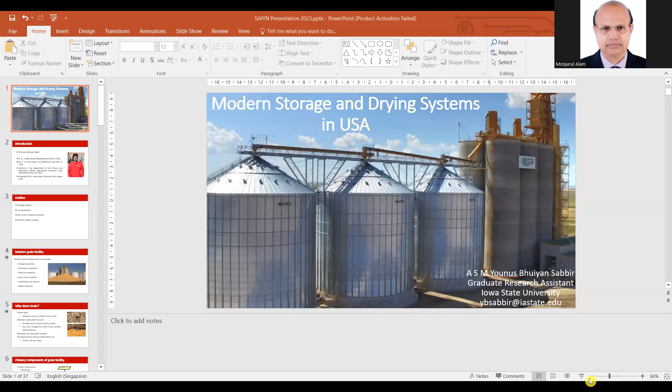Hello everyone, welcome to this seminar through internet connections. Today we are going to discuss the modern storage and drying systems in USA. I am ASM Younus Bhuiyan Sabbir, and I graduated from Bangladesh Agricultural University in 2018 and completed my master's in Farm Power and Machinery in the same university. I was also a lecturer in the Department of Farm Power and Machinery at Khulna Agricultural University for some time. Currently I'm studying at Iowa State University and trying to finish my PhD, which I started in August 2022.

Today we will discuss the storage systems present in USA, especially in commercial scale industries, and also the drying systems of the same industry. I'll also shed light on my current research activities and try to give you some guidelines on how to proceed for higher studies.

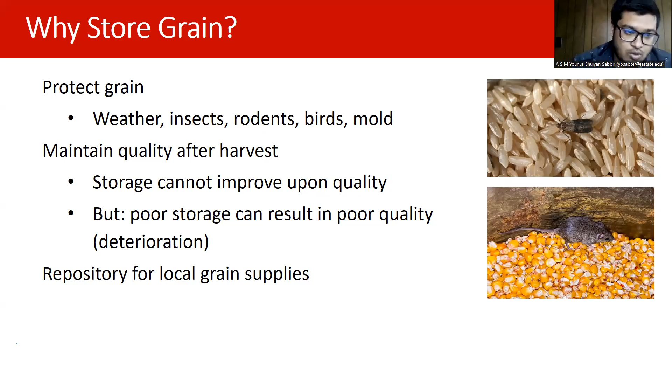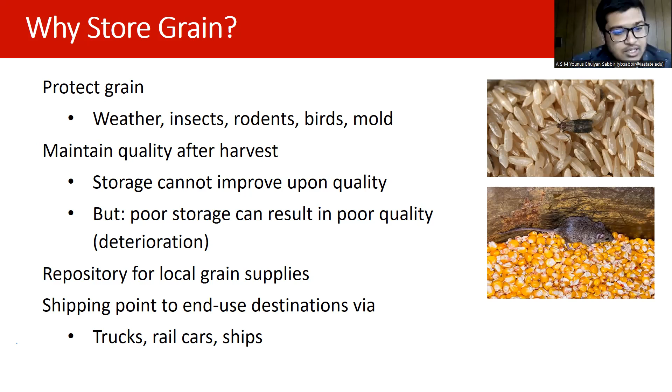And shipping point to end use destinations via trucks, rail cars, and ships are also another aspect of storing grain.

If we talk about the primary components of a grain facility, there are mainly 5 primary components. First is receiving the grain from the farmers or the source, and then distributing the grain into the storage facilities. After storing the grain for some time, people need to again deliver the grain to other facilities. For this reason, we also need the reclaiming section and the loadout section. Mostly these primary 5 components are present in all the facilities in the US and all over the world.

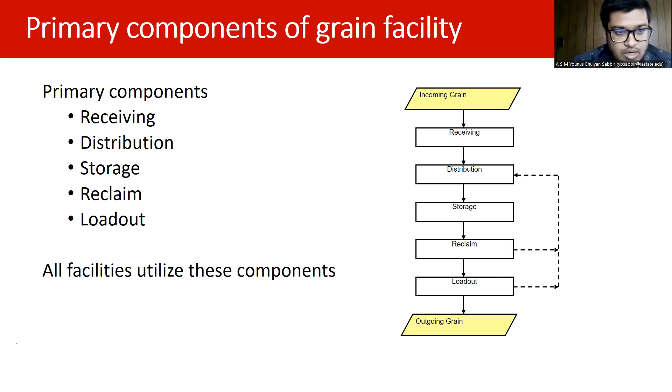If we talk about a grain elevator, at first you need to understand what a grain elevator is. The word elevator comes from the concept that when a facility receives the grain, it elevates the grain from the ground up. That's why the name elevator comes.

Generally the elevator works as a bucket elevator, screw conveyor, those kinds of handling equipment. In the US, the grain elevators receive the grain from the farmers and process the grains by storing and drying, and then they move it to different facilities like feed mills or ship it to different countries for specific purposes, like producing ethanol. They can produce ethanol from corn, which is produced in Iowa a lot.

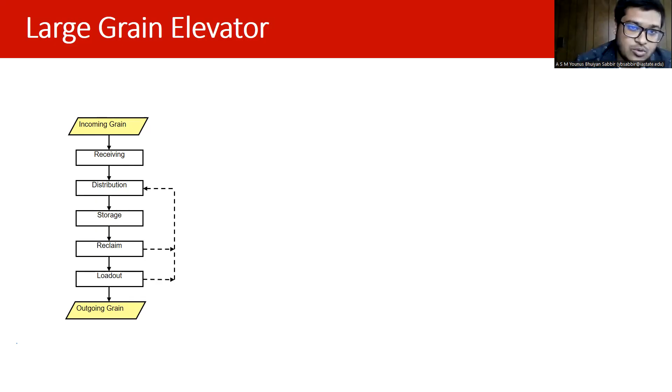I don't know if you guys can see the mouse or not. Okay, let me just check. Yeah, we can see your mouse. Okay, okay.

After storing the grain, you can also reclaim it through the underground channel or gravity channel, however the whole system is designed. After reclaiming it, you can send it through the loadout system, and there are different types of loadout. For example, you can discharge the grain by gravity or mechanical process. So this is a large grain elevator.

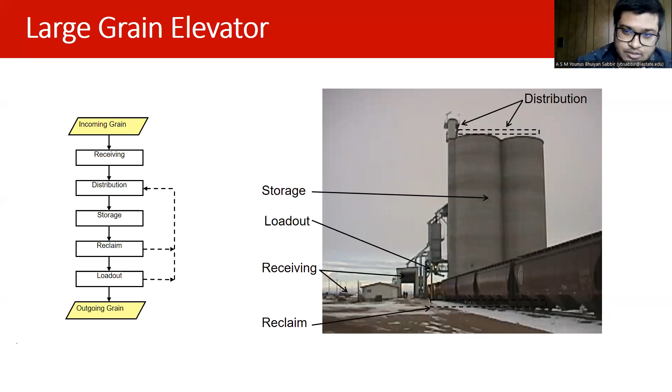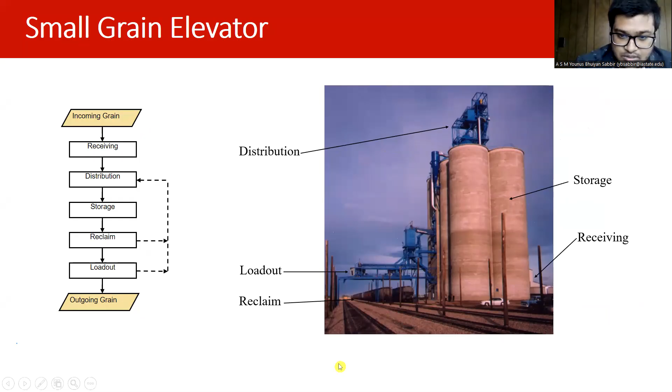So if we talk about those specific sections of this whole criteria, we'll talk about the receiving systems first. The purpose of the receiving system is introducing incoming grain into the storage facility and transferring grain to the distribution system.

Grain is typically delivered by wagon or trucks in the receiving area. Currently, in what I have seen in the last 9 months, wagons or trucks are the most common vehicles to transport grain around here.

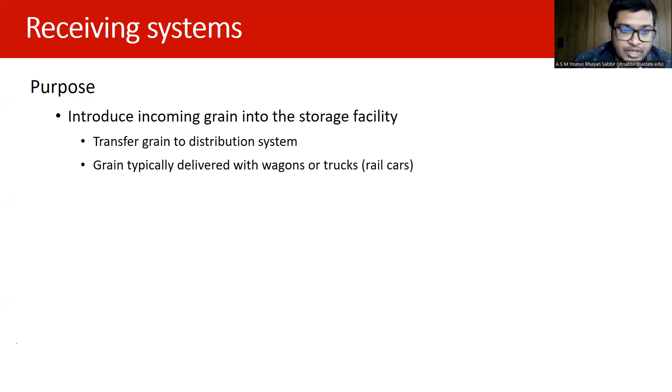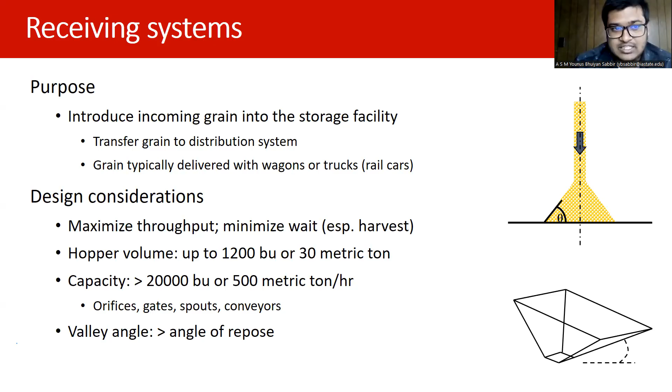We will see that there are a lot of weighing scales and testing probes in the receiving section, so that they can test the sample before it enters the facility and judge if those grains are acceptable for their facility or not.

For the design consideration of those receiving systems, we can see the goals are maximizing the throughput of the receiving system and minimizing the wait, meaning reducing the time during harvest, so they can get more corn during that period when the time is so busy and so much corn is coming in. This is the main aspect of designing the receiving system. There are hopper volumes, and the capacity of the hopper volume can be like 1,200 bushels.

So I don't know if you guys are familiar with the bushel unit. Bushel is a US unit relevant to weight, such as kg, ton, those kind of things. To simplify, 40 bushels of corn means 1 metric ton of corn. So here we can say the hopper volume can be around 30 metric tons, and the capacity of the whole receiving system can be like 500 metric tons per hour.

The receiving system used for receiving corn in these places can include orifices, gates, spouts, and conveyors.

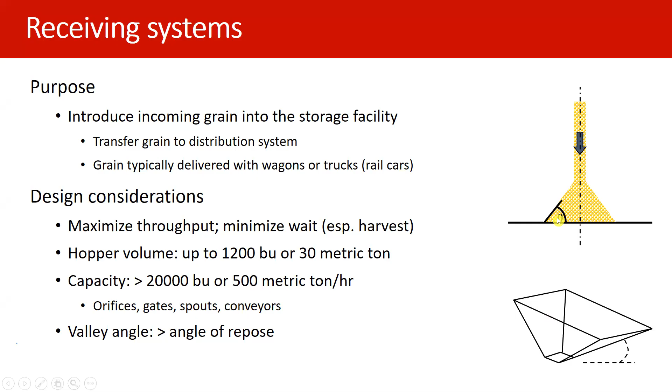When you place the corn or grain inside anywhere, there will be a sloping angle which you can see from this yellow picture. This angle is the angle of repose, and the valley angle needs to be higher than this for delivering the whole system and for maintaining the whole system.

The whole operation I mentioned just happens within 30 seconds to 1 minute. So the sampling of the system and testing of the samples needs to be fast so they can make a decision properly and reduce the time of the whole operation.

There is another area, the scale station, in general. It weighs the truck before entering the facility, and when the truck leaves the facility, they weigh it again to understand how much corn or grain they put into the facility. It's for recording the inventory and giving the charge to the customer.

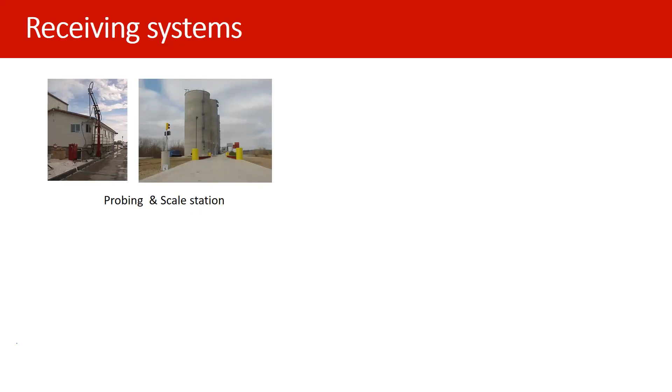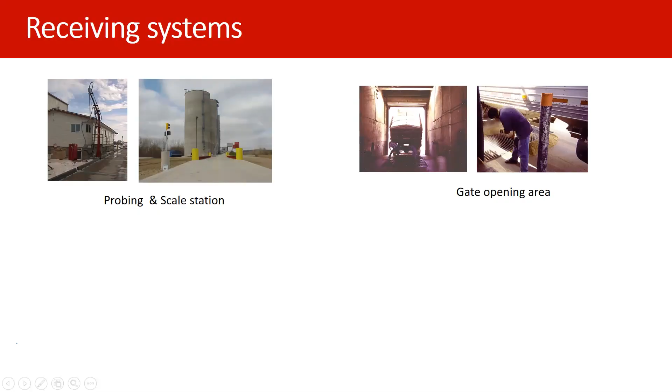And this is the gate opening area. You can see this truck coming into the opening area, and this is the gate. Usually there is a hopper underneath - it opens up and the corn or grain dumps underneath through different systems. After dumping the corn into the systems, these corns are delivered through mechanical conveyors into the whole distribution channel.

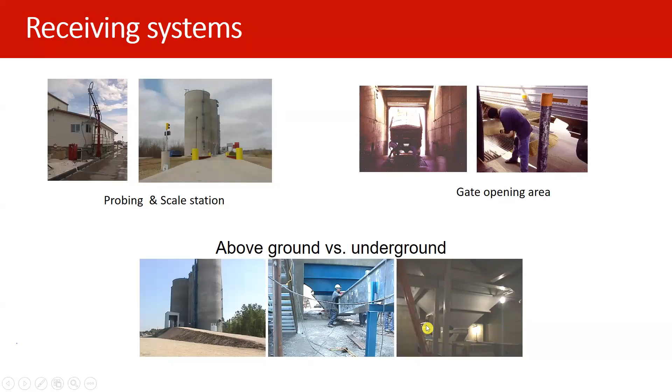So the purpose of a distribution system is to transport grain to appropriate storage locations. There are many types of distribution channels, such as bucket elevators, which transfer grain vertically, and drag or belt conveyors, which transfer grain horizontally.

The general bucket or belt conveyor alternative is the screw conveyor, which can also be used in different types, like twin screw conveyors and different configurations of screw conveyors. There are also distributors and spouting with square or round shapes, or lined or unlined shapes.

If we think about the design consideration of the distribution system, the equipment should have much higher capacity than the receiving rate. For example, if the capacity of the whole facility is 500 tons per hour, your design needs to be much higher than that, because during harvest season the flow rate of the whole system can be bigger, and if your equipment can't keep up with the receiving rate, it may clog up. That's why the general rule of thumb is to design it much higher than the receiving rate.

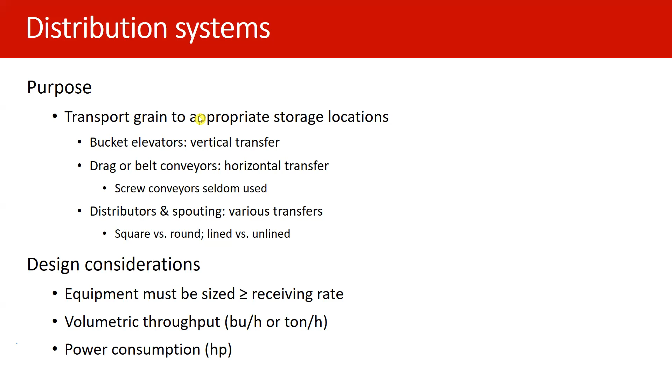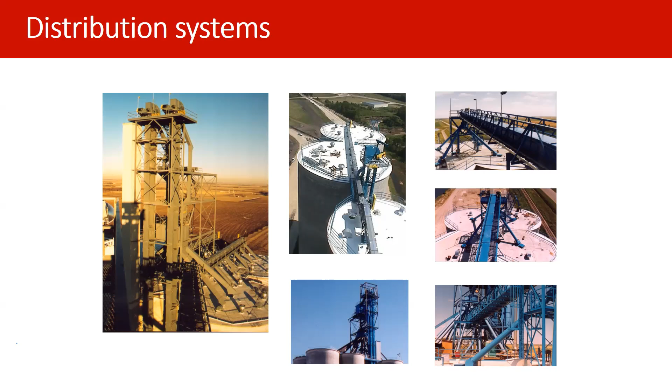If we see some pictures of the distribution system, here we can see belt conveyors which are transferring corn from one storage facility to another. There are different types of distribution systems used in the whole facility, and it depends on how your corn system is placed, how much space you have, how much money you have, and what you are trying to do in these facilities. These are the considerations made during the distribution system design.

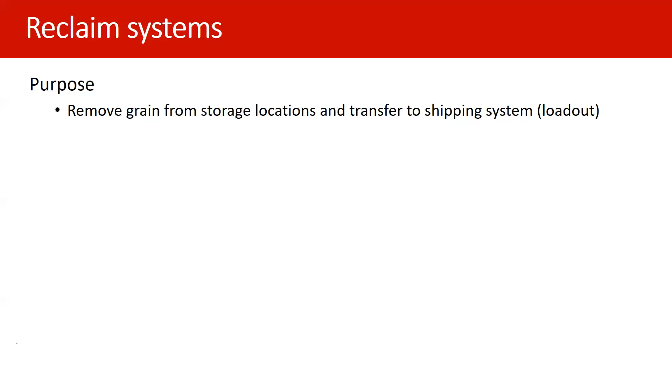If we talk about reclaim systems, the purpose is to remove grain from storage locations and transfer it to the shipping system, which is the loadout system. We've skipped one step, which is storage - we'll talk about it after reclaiming and loadout systems. So in the reclaiming system, after storing the corn, you need to remove it, and this is the point where it comes to reclaim.

If we consider the design of the reclaiming system, it's almost similar to the distribution systems - basically you are removing it from storage. When it was coming into storage, mostly it comes through gravity and through the distribution channel, which is in the top section of the facility or structure. In the reclaiming system, it usually happens in the bottom section.

There are different bottom designs, like hopper bottom and flat floor. If it's a hopper bottom section, there will be different techniques like side draw, eccentric discharge, or central discharge. In flat floor systems, you will use bin sweep augers or skid steer loaders.

Basically what happens here, they use different shovel techniques to clean the corn from there and send it to the loadout section. They also use concepts like screw conveyors and belt conveyors to move the corn horizontally or in an inclined way.

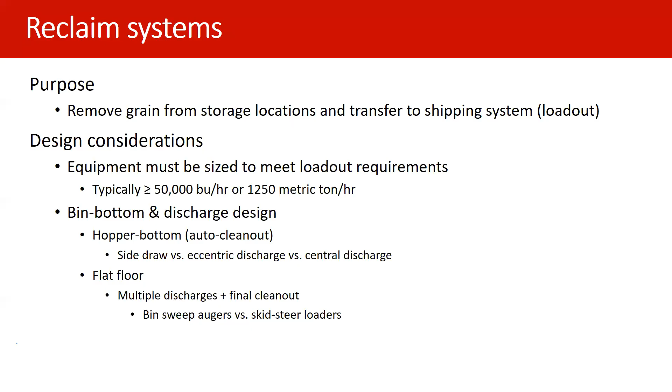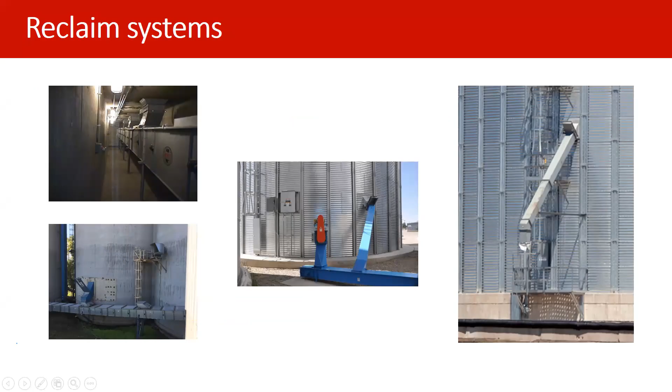Now if we talk about loadout systems, the purpose is to transfer grain to shipping containers. Typically the loadout system is used at the back of the facility, with road channels you can run through. For example, if you are moving corn through semi truck or wagon, you have to place it close to the receiving area, because the receiving area also uses semi trucks or wagons.

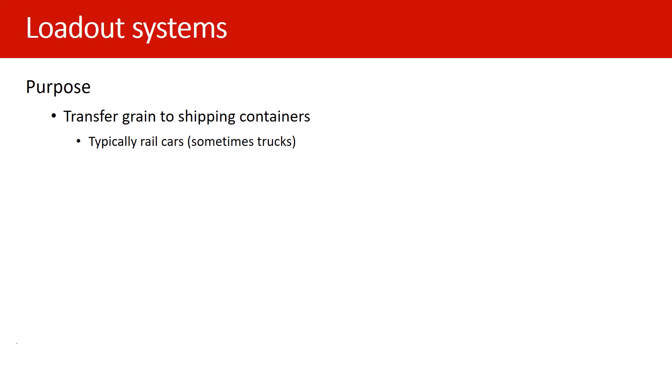Usually if your delivery channel is in bulk, for example you are moving corn from USA to Mexico, then you cannot use semi truck or wagon, so you are going to use rail cars. So the loadout system needs to be designed close to the rail car or transportation system to reduce time. Here in loadout systems, you typically use rail cars or sometimes trucks.

If we think about the design considerations of loadout systems: equipment sized for speed and labor efficiency - typically the reclaiming rate needs to be higher, and the loadout rate should be higher than the reclaiming rate. If we talk about how much it can load out at a certain time, the general consideration is 110-car unit trains within 15 hours.

Typically the equipment used in this area is overhead surge bins with support structure, and mechanical fill. There is a difference with overhead surge bins, which is basically a hopper placed on top of the semi truck so it can move around and dump the corn in a certain way. There are certain advantages to overhead surge bins, like it can control the loadout and move around, but mechanical fill cannot be moved around.

In the mechanical fill, you will get automation and flexibility, but you cannot control how much corn you are going to give at a certain time. There would be a specific rate which you can change, but you cannot control it at one time.

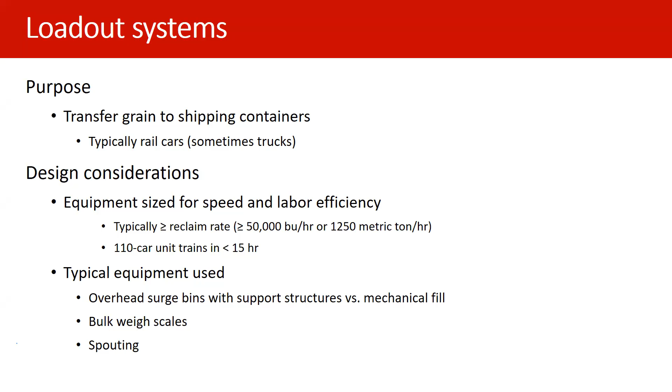Spouting is basically the piping system through which the corn or grain transfers into the loadout systems. There are two main loadout systems: one is gravity. You can see in the picture that the loadout is happening through the help of gravity.

So what is happening here, this is a rail line. The train will come in this way, and it will stop just underneath, and the corn will be transferred through this channel to the train.

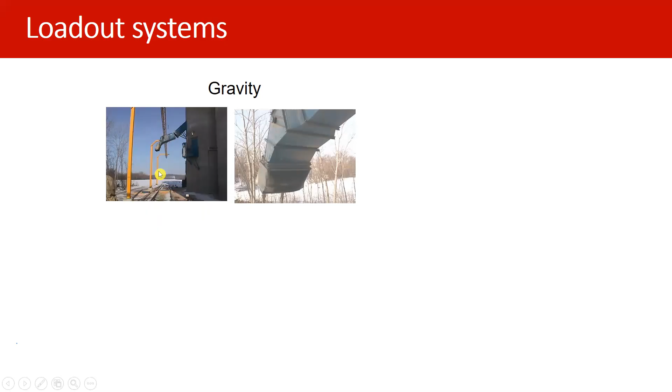If you think about the mechanical way, there are different places, like for example a conveyor, or the same thing which is happening in the distribution channel, it will happen in this way to the vehicle that you want to transport it with.

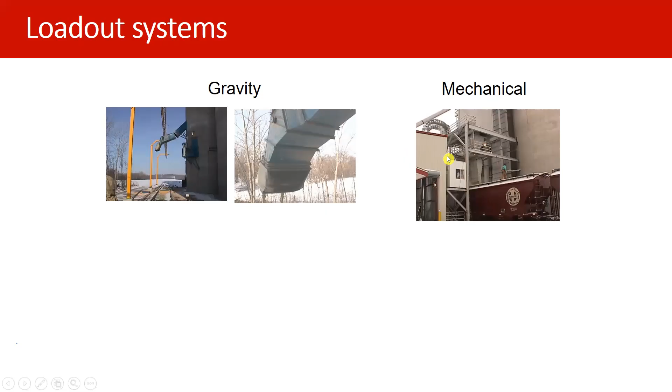There are some other facilities which use gravity and mechanical systems combined. What happens in this kind of facility is the corn comes from the top and goes into the system through gravity, and then it's shifted into a different channel where you want to put it. So these are the basic loadout systems.

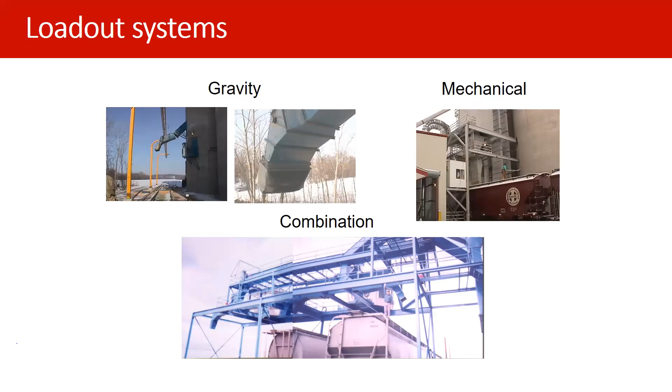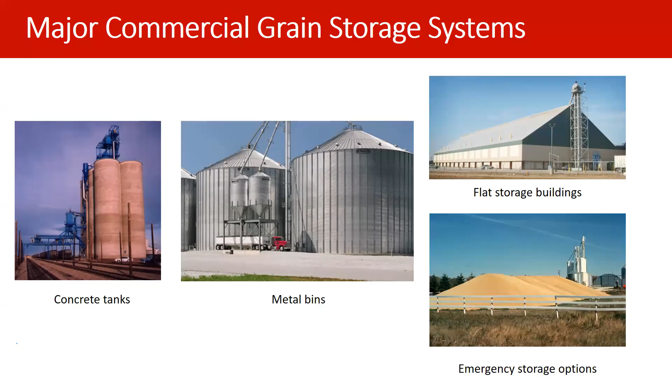Now if we want to talk about the basic storage happening at the commercial level, there is one which is concrete tanks, one is metal bins, there's flat storage buildings, and there are also emergency storage options. So now if we talk about the concrete silos established throughout the USA, this is the most common commercial grain storage structure.

Usually it stores large quantities of grain, and if you compare the cost with metal bins or other structures, the cost is relatively low in the long run. The building life of these concrete silos is around 50 to 100 years.

There's a variety of sizes and configurations in concrete silos. The usual height of these silos is 100 to 150 feet, and the diameter is 20 to 100 feet. You won't find a standard concrete silo structure.

It depends on the needs, requirements, and opinions of clients. So you'll see much bigger concrete silos in some places, and in other places you'll see a small concrete silo. So it depends on the demands and requirements of those clients.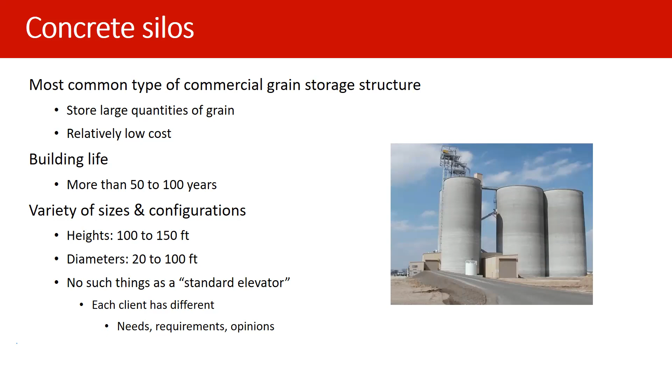If we now talk about flat storage, these are not very popular in terms of solely grain storage, because flat storage is also used for other purposes such as machine storage or hay storage. So you won't see that much flat storage around the USA right now for commercial scale.

But when storing grain in flat storage, you need to consider the moisture content as well. So the grain needs to be dried very properly before storing in flat storage.

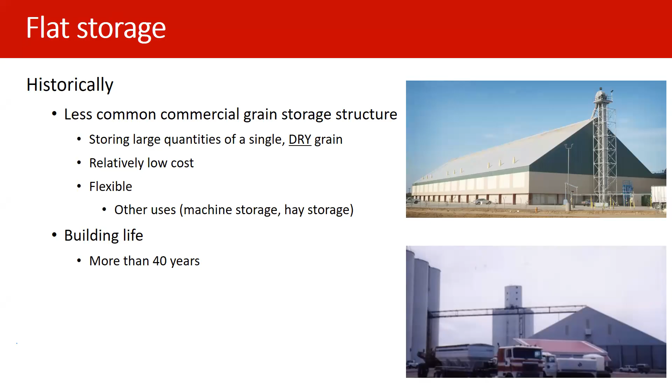During the harvest season, corn production is so much that the usual or general storage systems like concrete silos or metal silos cannot hold all the corn. That's why we come to the emergency storage system as well. The emergency storage system only happens when the storage capacity is exceeded, and it is basically outdoor piles where you put the corn.

Here in Iowa or in the USA, they use outdoor piles for corn. I'm not talking about rice or soybeans, because they have a lot of corn, that's why they're thinking in terms of corn. Outdoor piles like this, what you're seeing in the pictures, is very normal during harvest season, and sometimes the volume of that corn is much higher than the concrete or metal silos.

The consideration in emergency storage is that it needs to be stored for 1 to 3 months, so the outdoor piles need to be designed that way. But there are some limitations in the outdoor system, because there are higher losses in emergency storage, and it can be easily accessible for rodents, insects, rain, or spoilage.

One important thing to remember when storing outdoors is that your corn needs to be dry. For example, you are receiving corn or grain at 20% moisture content, but you cannot store it that way. You need to dry it to a certain level, usually around 15% for corn, so you need to remove the moisture content down to within 5% before storing it in an outdoor pile.

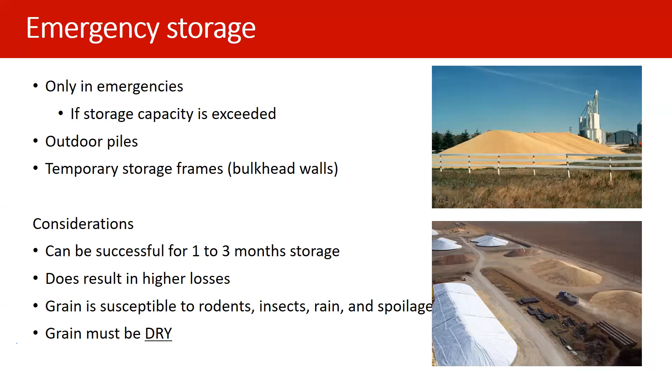If we think about the monitoring system of the storage bin, we are very much familiar with temperature of the air and grain in the monitoring system, and we also monitor the relative humidity. But there's another parameter used in the USA, which is called carbon dioxide.

They measure carbon dioxide to understand how much is inside the silos where the corn or grain is placed. From the detection of carbon dioxide, they can understand that if it is higher, there are more biological activities happening inside the silos, which helps them detect that there's something you need to do.

In a monitoring system you cannot measure the moisture content continuously, because these storage systems like metal bins or concrete silos are so big people can't enter into them. They only enter the design facility, so they need to monitor those storage bins from the outside. Measuring temperature, relative humidity, or carbon dioxide is their only way to know if the corn is going bad or not. That's an important aspect of monitoring the storage bins, to understand how carbon dioxide works inside the corn storage.

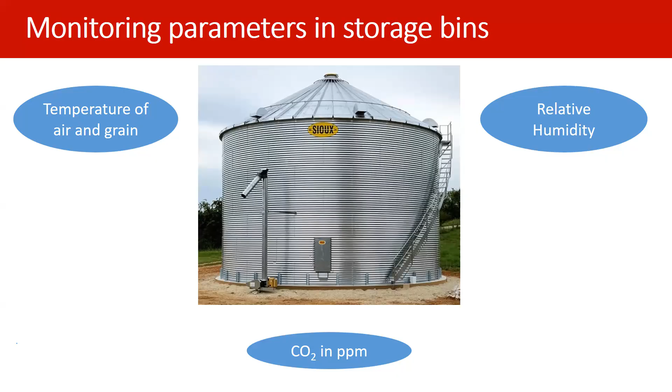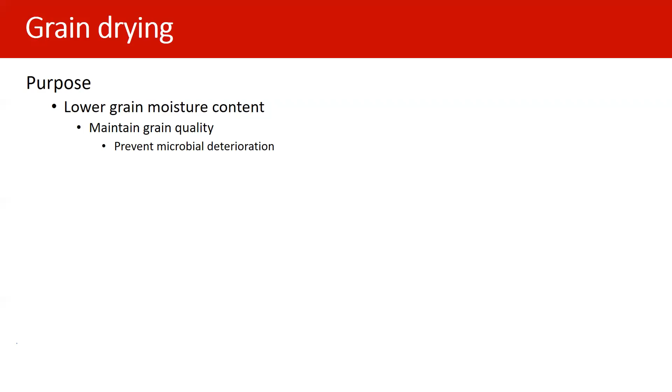Now, if we talk about the grain drying system, the main purpose of grain drying is to lower the moisture content, maintain grain quality, and prevent microbial deterioration.

The design consideration for grain drying is that there are many terminals where they don't use the drying system individually. In grain elevators, they usually have grain dryers to dry the grain and then ship it to a feed mill or ethanol plant. So the equipment must be sized to meet receiving rates, and drying is typically a limiting factor in a facility.

If the dryer's capacity is 1000 bushels per hour or 10,000 bushels per hour, the whole design depends on that drying capacity. Because if you cannot dry your corn in a timely manner, then it doesn't matter if you have higher storage capacity, because you can't store it properly without reducing the moisture content. If you store it wet, your corn will be damaged. So drying is an important function and a limiting factor in designing the whole facility.

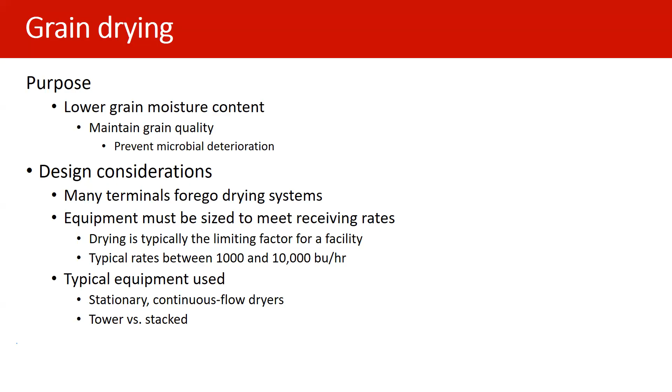Usually there are different types of drying equipment. For example, there's a stationary or continuous flow dryer, and there's a tower or stack dryer. We're much more familiar with the stack dryer, but there isn't much tower dryer that you see in Bangladesh. Usually in commercial scale, there are cross flow tower dryers, cross flow stackable dryers, and mixed flow dryers. We see a lot of mixed flow dryers in Bangladesh, but not many tower dryers, if I'm remembering correctly.

If we talk about the tower dryer and how it works, in this diagram there's a heating section, a burner and a blower, and the corn comes through this way and moves this way, and there's a cooling section as well. The air comes from the bottom, the blower blows the air, and the burner heats up the air, and this area is basically the main heating section.

It passes the air through the sides, and the corn comes in this way and rotates until it is totally dried. So this is a typical picture of a tower dryer, and you can see some cross section as well. Here you can see this is the hot area, this is the burner, this is the cooling area, and this is the corn which is surrounded by the hot area.

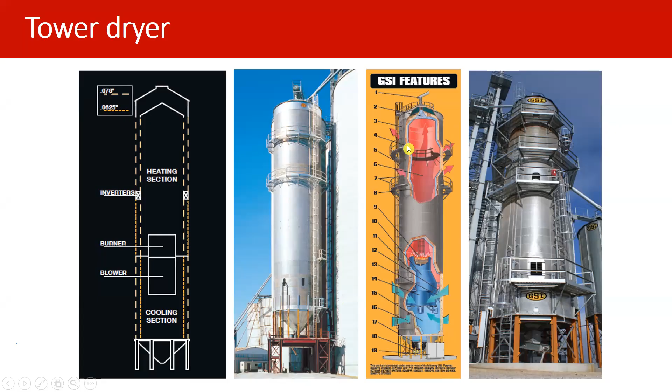So here is a video that I have used from YouTube. It will give you a better idea how the tower dryer works. I'm going to play the video. If you cannot hear it, please let me know.

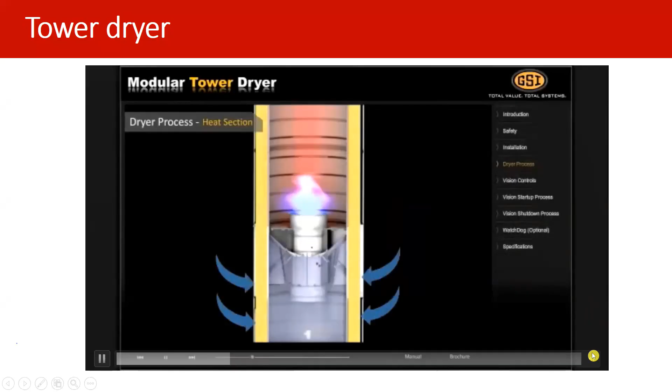There is no sound actually. Okay. Can you hear it right now, sir? We cannot hear, but we can see. That's okay, the player is okay. Let me say what is happening here.

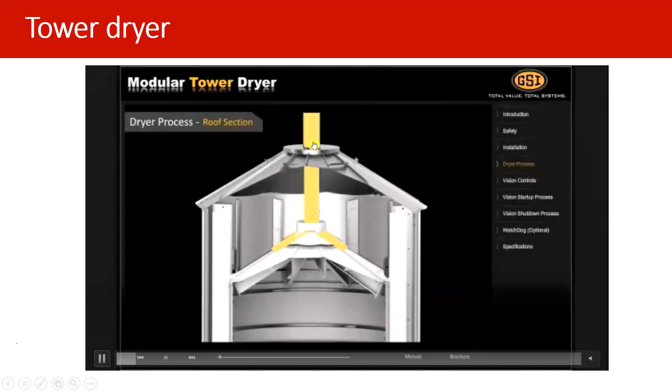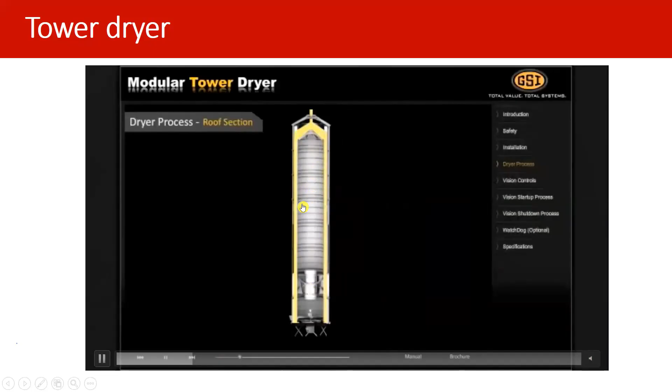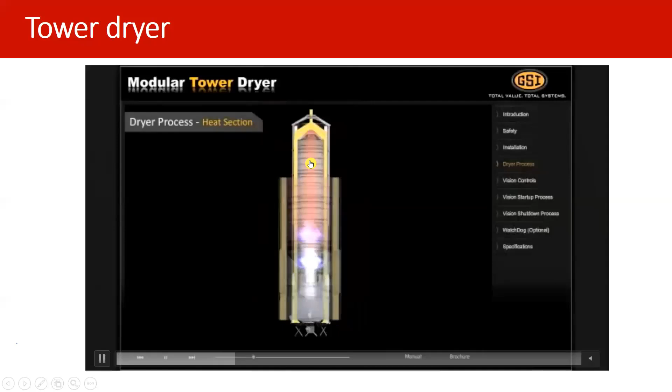Basically the corn is coming from this way, and it is moving to the sides, and this is the main chamber. You can see that this chamber has different sections, and each section has different functions. When the corn is filled throughout the system, the burner will light up and the air will be heated, and from this hot air it will pass throughout the channel, and that's how the whole drying system works in the tower dryer. You can see these are closed to circulate the air properly, and there is cold air coming from the ambient.

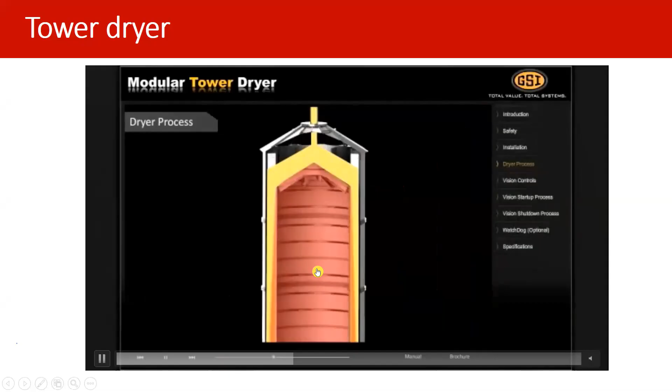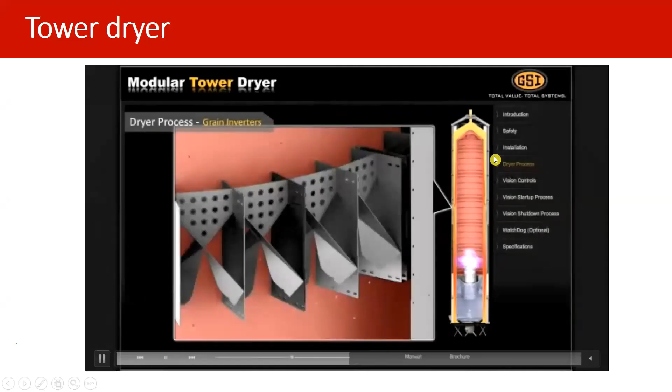It will recirculate the corn until it has the optimum moisture content, and after the whole drying section, it will pass through these channels and go into the facilities, maybe a storage bin or other section. So basically this is the principle of the tower dryer.

If we think about the next dryer, which is called the cross flow stack dryer, this dryer has the same principle, but the tower dryer was vertically structured, and this is a horizontally structured dryer. The principle here is almost similar - there's a hollow section where the hot air will be heated, and the corn will be in the surrounding area, and the fan will blow the air through the system, and it will cross interact with the corn.

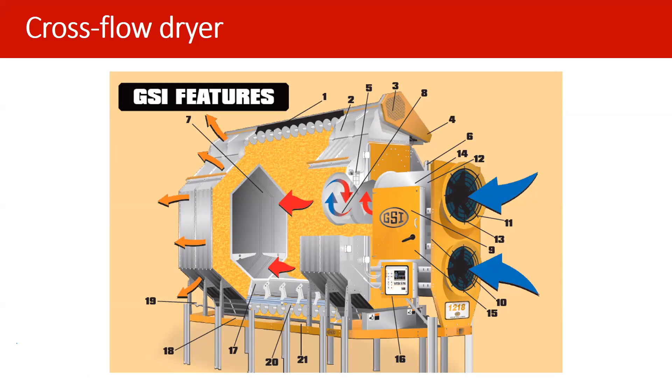But the reason it's called a stackable cross flow dryer is because this is one singular unit. You can add more units to dry more corn, so it can increase capacity based on your demand. That's why it is a stackable cross flow dryer.

There's another type called mixed flow dryer, and there's another video for it. Let me explain the video.

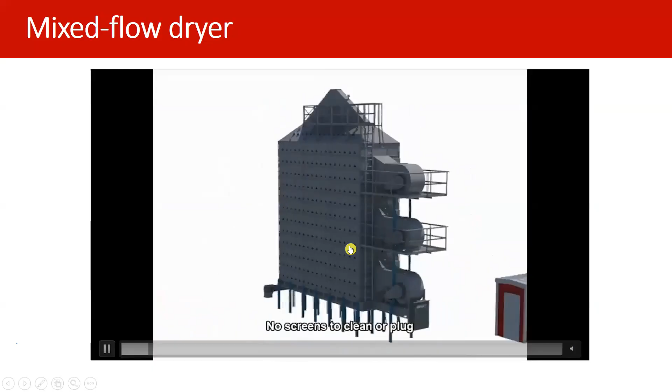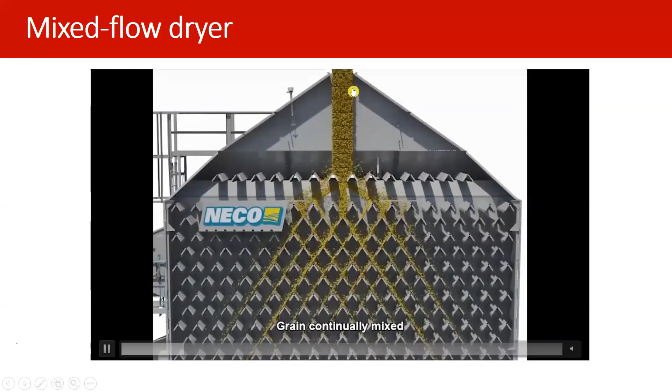So this is a mixed flow dryer, which is very common in our country as well. This dryer is also stackable - you can stack it and increase the capacity. The filling of the corn is from the top section, and the corn fills throughout the whole channel.

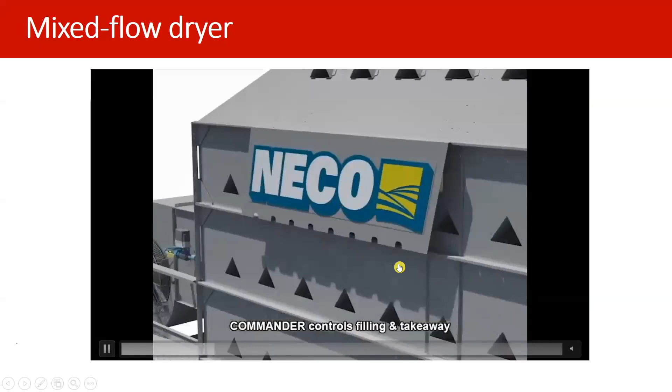You can see there are different patches where you can put the corn, and there's also a hollow system like the cross flow dryer to pass the hot air inside these dryers, and the hot air passes through these systems. There's another area to cool as well - this is the coolant section underneath.

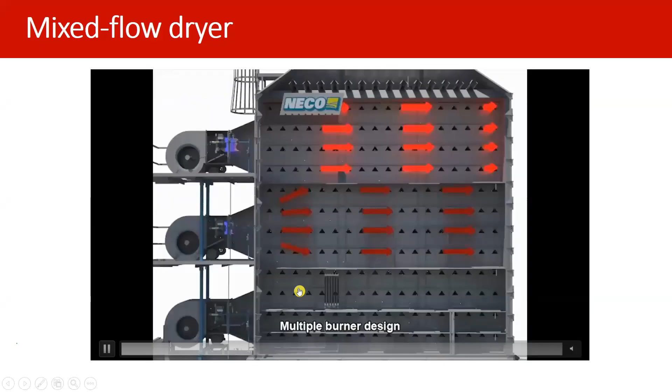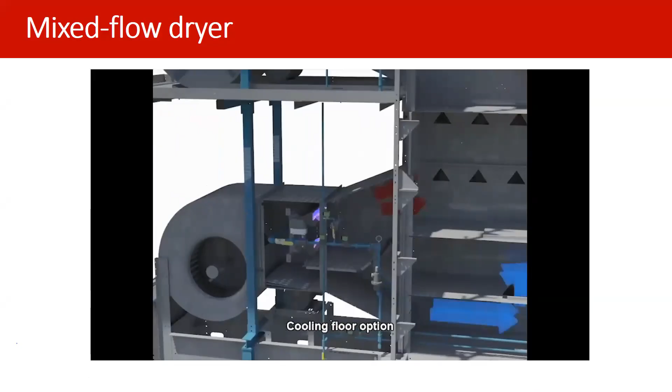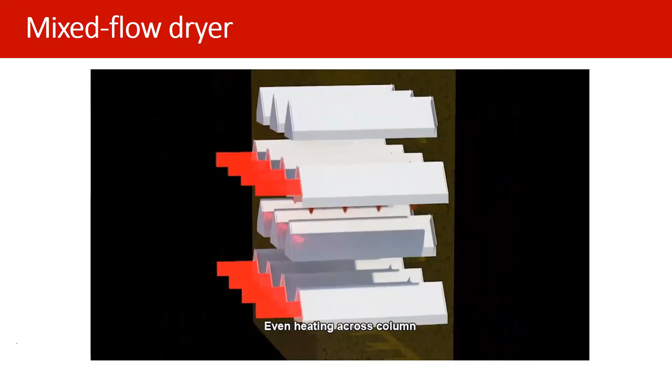So usually what happens in a mixed flow dryer is there's one-third cooling section and two-thirds heating section. For example, if the capacity needs to be increased, the cooling section can be removed, and the whole 100% of the dryer can be used for only heating. That's why the mixed flow dryer is getting popular in the US, so they can increase capacity based on their demand.

You can see the mixed flow here - one flow is coming straight and one flow is coming from the sides. So the flow's direction is mixed, that's why it's named mixed flow dryer.

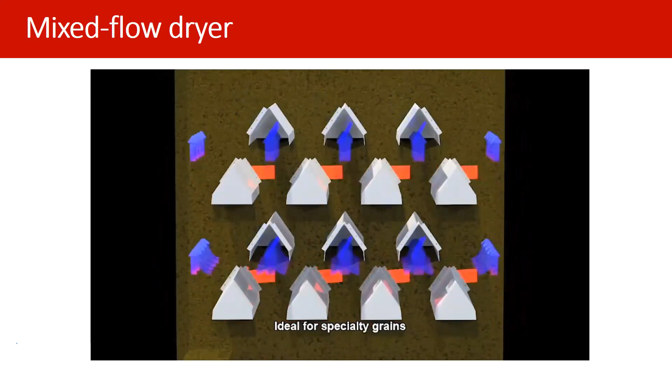I think we can continue from the mixed flow dryer. There's another drying system in the commercial scale, which is called in-bin drying. What we have seen in other dryers is there's a separate, specific unit for drying. But in the in-bin drying system, you don't have a separate drying system.

The drying system is attached with the silos, the metal silos that we have seen before. In metal silos, if you put a burning unit and a fan and certain design considerations for drying, you can use those storage bins for the drying system as well.

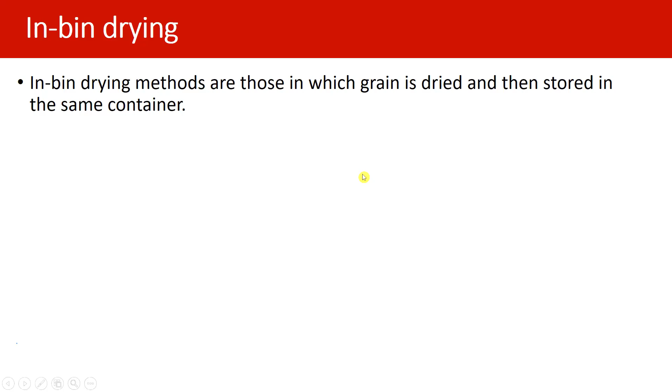Generally, the dryer in the in-bin system is equipped with a perforated floor, an electric motor-driven fan, and an air heater or burner. Sometimes it doesn't have an air heater or burner, depending on the temperature or weather condition of the ambient air.

So the main limitation with in-bin drying is the weather condition. If the weather is too cold, you cannot dry it easily because you would need too much energy. So it depends on the weather condition and what time of year you are drying in the in-bin drying system.

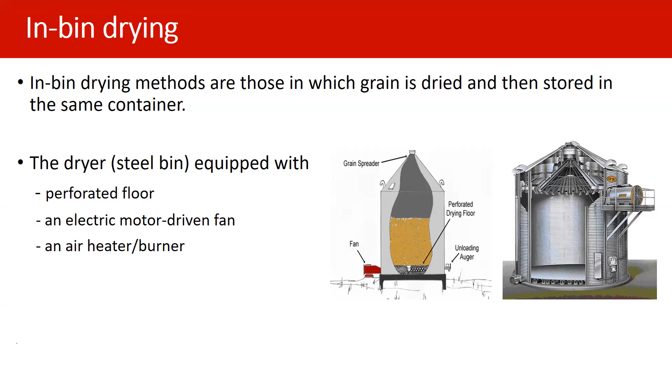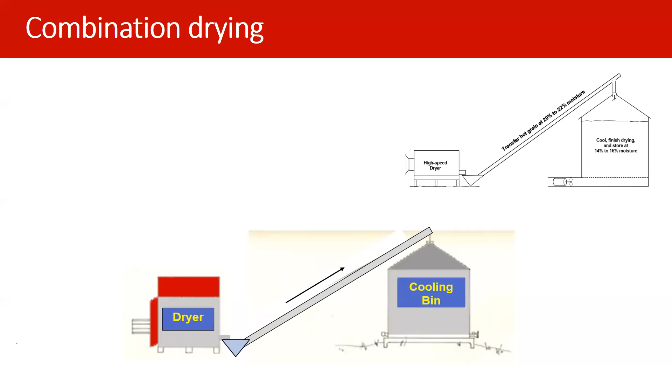There is another method called combination drying, where you use conventional dryers to dry the corn at high capacity, then move it to a cooling bin to cool down and complete the rest of the drying. This way, you utilize the whole system better, and energy costs are reduced compared to high speed drying.

For example, you dry the corn here to about 20% or 22% moisture content, then transfer it to the cooling bin and dry the rest, down to about 15%, in the cooling bin. That's how you reduce energy cost and increase efficiency of the whole system. You can also increase drying capacity and improve grain quality through combination drying.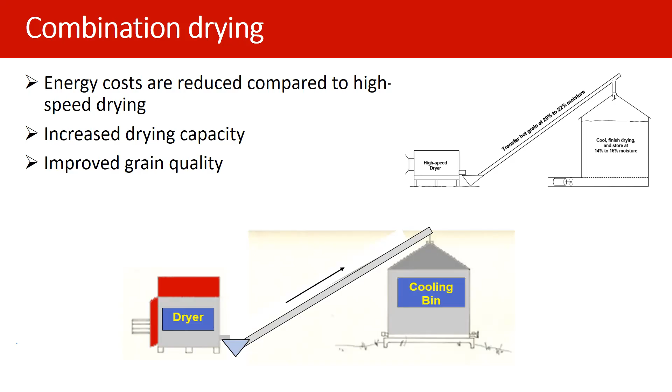So that's all the information I wanted to cover, gathered from a course I took at Iowa State University called ABE 469 or 569, which is a combined graduate and undergraduate level course. The videos I've shown you were collected from YouTube.

Now I'm going to talk about my current research activities. I'm currently working on a project titled Assessment and Approaches for Achieving Net Zero Carbon Emissions for Grain Drying, Handling and Storage Operations. Basically, we're trying to reduce carbon emissions, and if we can achieve net zero carbon emission in drying, handling, and storage systems, the whole agricultural operation becomes much greener.

Our main focus right now is to use renewable energy, or energy that can produce a high amount of power in a short time, usable in large facilities. If we increase the efficiency of a dryer, it automatically results in less carbon emission for the environment. With better drying, storage, or handling systems, we get a much greener environment throughout the world. So that's our main research objective: to find technologies we can use other than conventional drying or storage systems in grain facilities.

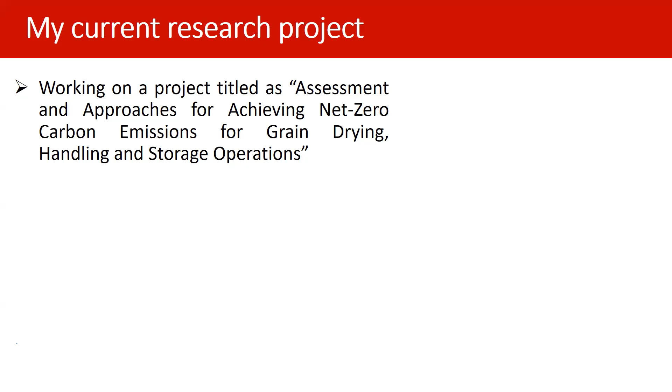Right now, my primary research station is the Feed Mill and Grain Science Complex at Iowa State University. The feed mill is currently being built, and we hope to begin operating within the fall semester, which is August of 2023.

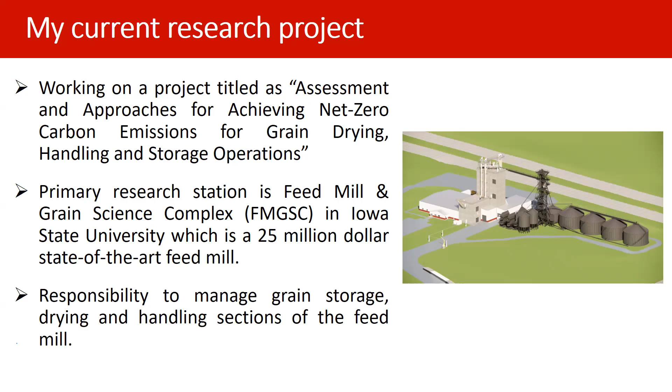My supervisor here, Dr. Meyer, is the director of this feed mill and science complex. Currently, my responsibility at the feed mill is to manage grain storage, drying, and handling operations. So starting in August, I'll need to work on and control the whole grain storage, drying, and handling operations.

If you look at this current picture of the feed mill, you can see the grain silos, the metal bins we talked about, and two other bins called wet holding bins.

So this is an interesting concept as well. When the corn is coming into the facility, they don't put it directly in the bins because it's wet. So before putting it there, they put it in the wet holding bin and dry it. You're not seeing the dryer here - we have a mixed flow dryer which you'll see in the next picture. This picture was taken before that dryer was placed, so right now there is a dryer in here. In the wet holding bin there's the wet corn, and it will be transferred to the dryer, dried, and then transferred into the metal bins. So this is basically the grain storage and drying system.

This is another thing called the feed mill, and here you do the pelleting, grinding, hammering, conditioning of the grain and corn and other stuff to make feeds for different animals. So this is, as a whole, the typical picture of a feed mill in the USA.

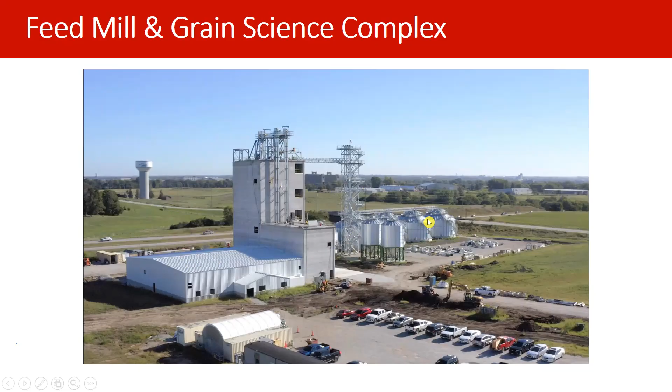Here's the picture I was talking about, the mixed flow dryer that we have right now. From the wet holding bin you get the corn to the mixed flow dryer, and then after drying it you can transfer it to the general metal bins.

So basically this is my current research activities. If I want to talk about higher studies, I'd like to talk about that later. If you guys have any questions about the presentation or anything, feel free to ask. Thank you.

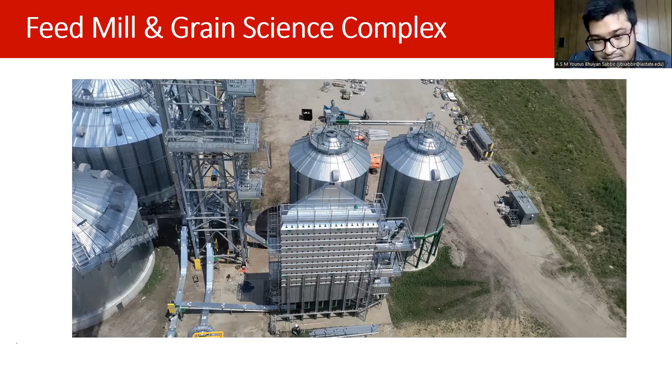No, thank you Sabbir. This is Monjurul Alam. Can you just stop sharing, please, so that everyone can see the faces? Yeah.

It is not really a question, it is really thank you, Younus. You have given a very nice presentation, especially for the students who are taking the course here, agricultural process engineering, and some of the students have done work on storage and drying systems like you.

So we have also designed a mixed flow drying system of 12 to 16 ton capacity dryer. That is the same system. Here the temperature is actually maintained around 85 degrees Celsius. So what I will mention is that it is similar to that. Yes, that's good.

And especially another thing, your concept of heat pump is really good. I know the initial investment cost will be much higher, but if it works, then that will be a good thing to do. In the case of heat pump, there will be some energy needed, whether that energy will come from a renewable source or some other source—that needs to be considered. That is one of the areas.

And another area—the students who are participating in this particular seminar are really keen, especially on larger storage systems. The Bangladesh government has already installed some of the larger grain systems. Although these are not yet in operation, when they are in operation, we would like to see, and the students would like to see, those silos and how these things are actually operating.

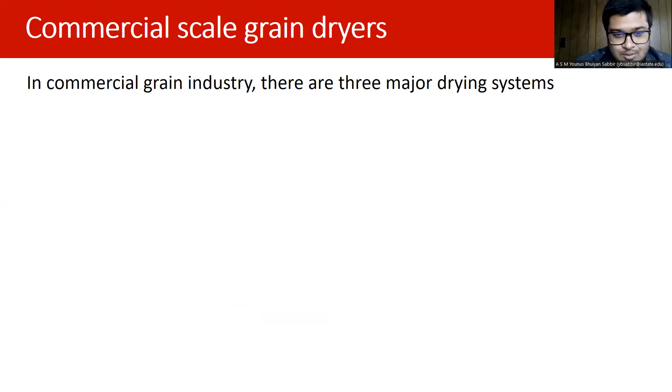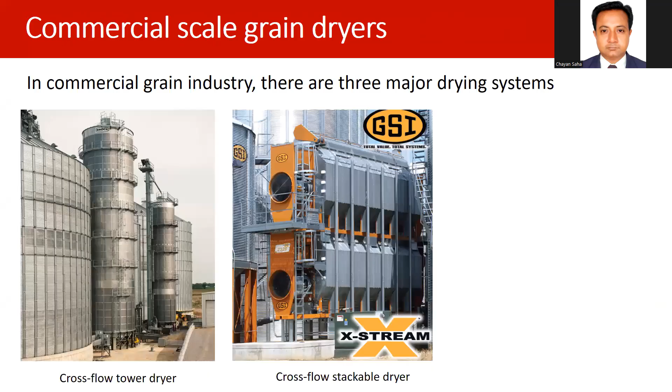তো প্রথমে যে জিনিসটা আসে সেটা হচ্ছে রিসার্চ এক্সপিরিয়েন্স। কারণ আমরা যখন মাস্টার্স বা পিএইচডির জন্য আসবো, অবশ্যই কোনো না কোনো ধরনের রিসার্চের সাথে ইনভলভ হতে হবে। তো যখন হায়ার স্টাডিজে আসা হয় তখন রিসার্চ এক্সপোজার থাকলে একটা স্টুডেন্টকে ইভালুয়েট করতে সহজ হয়।

তো প্রথম হায়ার স্টাডিজের স্টেপ হচ্ছে রিসার্চ এক্সপোজার থাকতে হবে। তারপরে একটা এভারেজ সিজিপিএ থাকতে হবে। অনেক সময় দেখা যায় যদি একটু কম সিজিপিএ থাকে তারা ভাবতে পারে হায়ার স্টাডিজ করা সম্ভব হবে কিনা। ব্যাপারটা এমন না। একেবারেই ভালো রেজাল্ট লাগবে না তাও না, বাট যাদের কম সিজিপিএ বা এভারেজ সিজিপিএ আছে তারাও হায়ার স্টাডিজ ডেফিনেটলি পার্সু করতে পারে।

তখন হয়তো একটু বেটার রিসার্চ এক্সপিরিয়েন্স লাগবে। হয়তো আরেকজনের একটা বা দুইটা সায়েন্টিফিক পেপারের কারণে হায়ার স্টাডিজ হয়ে যাচ্ছে, কারোর জন্য হয়তো এটা তিনটা চারটা লাগবে, বা স্পেসিফিক একটা রিসার্চ ফিল্ডে একটু বেটার রিসার্চ লাগবে। সো সিজিপিএ কম হলে হায়ার স্টাডিজ করা যাবে না ব্যাপারটা এরকম না।

আর অবশ্যই হায়ার স্টাডিজের জন্য নেক্সট স্টেপ হচ্ছে আইএলটিএস অথবা টোফেল সাধারণত লাগে। এই দুইটার একটা থাকতে হবে, এবং এটা দেশ ওয়াইজ ভ্যারি করে। দেখা যায় কোনো দেশে আইএলটিএস বা টোফেলের কোনো একটা প্রিফার করতেছে। তো খুব নর্মালি যেটা হয় যে আইএলটিএসটাই সব জায়গাতে একসেপ্টেবল হয়।

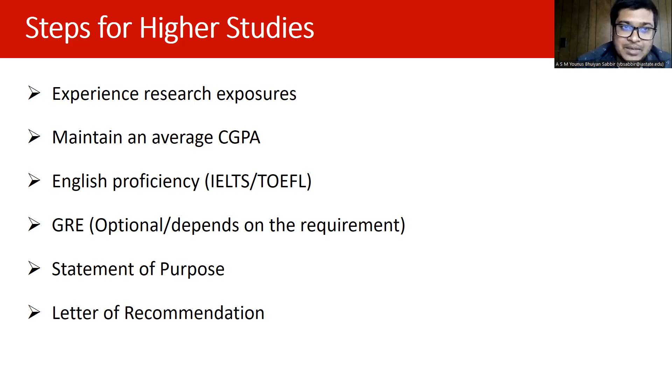এটা হচ্ছে একটা। আর বাকিটা হচ্ছে লেটার অফ রিকমেন্ডেশন। লেটার অফ রিকমেন্ডেশন অবশ্যই যারা আপনাকে ভালো করে জানে, যেই টিচার আপনাকে ভালো করে জানে তাদের কাছ থেকে নেওয়াটা ভালো। তাহলে তারা একটা অনেস্ট ফিডব্যাক দিতে পারে, যেটার মাধ্যমে আপনার প্রোফাইলটা আরো এনরিচ হয়।

সো এই কয়েকটা জিনিস হায়ার স্টাডিজের জন্য ইম্পর্টেন্ট। অবশ্যই রিসার্চ এক্সপোজার দরকার আছে, সিজিপিএ এভারেজ অথবা বেটার হলে আরো ভালো, আইএলটিএস দরকার আছে, জিআরইটা অপশনাল, স্টেটমেন্ট অফ পারপাস খুবই ইম্পর্টেন্ট, লেটার অফ রিকমেন্ডেশনও দরকার আছে। এগুলা বেসিক্যালি আমার মতে হায়ার স্টাডিজের স্টেপস।

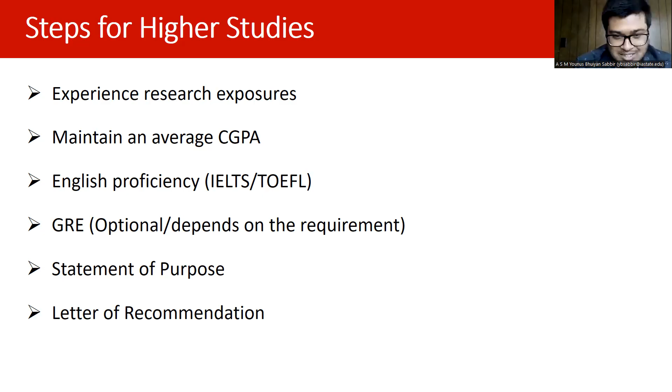আর হায়ার স্টাডিজের কথা শুনতে খুবই ভালো লাগে, বিদেশে পড়াশোনা বা এই জিনিসগুলো, বাট আরো একটা জিনিস আমরা ওভারলুক করে যাই হায়ার স্টাডিজে, সেটা হচ্ছে আদৌ হায়ার স্টাডিজটা আমার জন্য কিনা। আপনি যদি জেনুইনলি রিসার্চের প্রতি প্যাশনেট না হন, তাহলে হায়ার স্টাডিজে, মাস্টার্সে অথবা পিএইচডিতে এসে সার্ভাইভ করাটা অনেক সময় ডিফিকাল্ট হয়ে যায়।

কারণ আপনি যদি সেলফ মোটিভেটেড না থাকেন রিসার্চের প্রতি, তাহলে এই জার্নিটা যাওয়া খুবই ডিফিকাল্ট। আর অবশ্যই অনেক ধৈর্য থাকতে হয় হায়ার স্টাডিজে। যেমন হিট পাম্পের কথাই বলতেছি, জানি না হবে কিনা, কিভাবে হবে, বাট অপশন এক্সপ্লোর করতে হবে, ওই পেশেন্সটা থাকতে হবে।

এবং একটা ডেডলাইন, একটা কিছু ফিনিশ করার ডিটারমিনেশনটাও হায়ার স্টাডিজে দরকার। আর একটা জিনিস অবশ্যই অনেস্টি দরকার। অনেস্টি না থাকলে দেখা যায় কাজের কোয়ালিটি ভালো হবে না। এবং এইসব দেশে কাজ অনেস্ট ওয়েতে না করলে এটা খুব সহজেই ধরা পড়ে যায়।

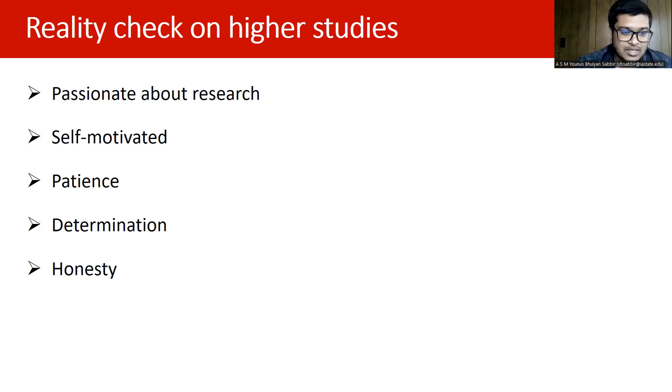কারণ এখানে সবাই সবার কাজ পড়তেছে, সবাই কে কি করতেছে এই নলেজগুলো পড়তেছে, জার্নালে কে পাবলিশ করতেছে, কি ধরনের কাজ হচ্ছে, এই সবকিছুই কিন্তু একজনের ফিল্ডের সাথে সবাই রিলেটেড। সো এই জিনিসগুলো হায়ার স্টাডিজে ইম্পর্টেন্ট আমার মতে। এটাই ছিল হায়ার স্টাডিজের ব্যাপারে। আপনাদের কোশ্চেন থাকলে বলতে পারেন প্লিজ।

আমার একটা কোশ্চেন আছে। আমি মাহফুজুর মান্নান উদয়, ফ্রম ডিপার্টমেন্ট অফ ফার্ম পাওয়ার অ্যান্ড মেশিনারি, বাংলাদেশ এগ্রিকালচারাল ইউনিভার্সিটি। আমরা এখানে দুই ধরনের সাইলো দেখলাম, একটা কংক্রিট সাইলো, একটা মেটাল সাইলো। আমরা জানি এদের

হিট অ্যাবজর্পশন পটেনশিয়াল আলাদা। মেটাল যে পরিমাণ হিট কন্ডাকশন পদ্ধতিতে অ্যাবজর্ব করবে, কংক্রিট সেই হিসাবে করবে না। এই দুইটার ক্ষেত্রে টেম্পারেচার কন্ট্রোলের জন্য কুলিং বা হিটিং এর ক্ষেত্রে অবশ্যই ভিন্ন ধরনের পদ্ধতি ব্যবহার করা হবে। আর একটায় বললেন যে উপরে পারফোরেটেড থাকে। এখন যদি উপরে পারফোরেটেড থাকে, তাহলে বাহিরের তাপমাত্রা ও বৃষ্টিপাত প্রভাব ফেলতে পারে - সেই ক্ষেত্রে ভিতরের ময়েশ্চারটা কিভাবে কন্ট্রোল করব?

আচ্ছা, মেটাল সাইলোর ক্ষেত্রে যেটা, সেটা উপরে না, নিচে থাকে - নিচে পারফোরেটেড ফ্লোর থাকে। ধরেন এটা টোটাল মেটাল সাইলো, এইখানে একটা পারফোরেটেড সেকশন আছে, সো এখানে একটা গ্যাপ আছে। আমরা যে ফ্যানের কথা বলতেছি, যেহেতু মেটাল সাইলোর হিট অ্যাবজর্পশন বেশি এবং এটা তাড়াতাড়ি গরম হয়, তাই সেখানে বাই ডিফল্ট ফ্যান লাগানো থাকে। ফ্যান নিচের পারফোরেটেড সেকশন দিয়ে বাতাস ওই ফাঁকা জায়গা দিয়ে ভিতরে পাঠায়, এতে এয়ারেশনের মাধ্যমে গ্রেইনের টোটাল কোয়ালিটি কন্ট্রোল করা হয়।